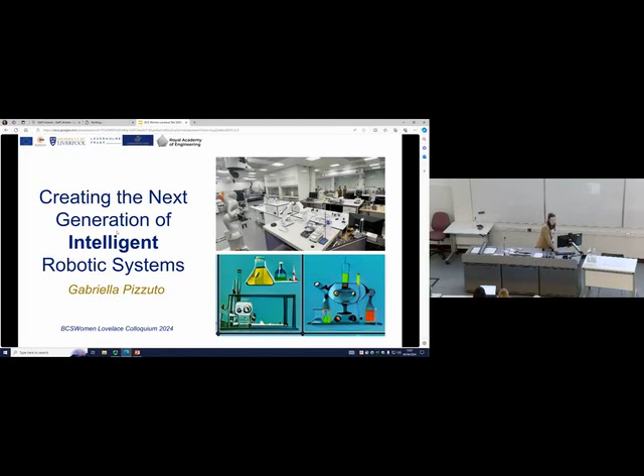I'll start with a short introduction about myself. I like taking pictures with robots, I like working with robots. I did my MSc in Computational Neuroscience and Cognitive Robotics at the University of Birmingham. I did my bachelor in Malta, I'm originally from Malta, and I did it in engineering. So I started in computer science quite late, I would say, during my MSc.

I started working with robotic arms. I don't know if anyone is from Birmingham here, but there was what we called the robotics dungeon. It was underground, and there was the lab there. I spent a lot of time during that summer.

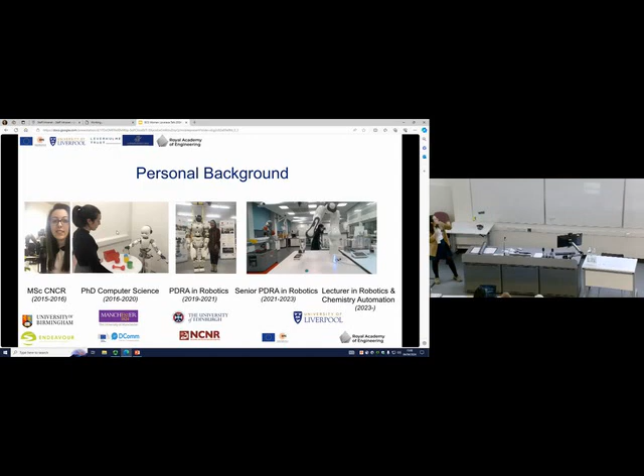Then I moved to the University of Manchester, and I did my PhD in computer science there, working on the humanoid iCub robot. During my PhD, I was also part of a Marie Curie program, and I did some visiting projects at the Italian Institute of Technology to learn more about working with the iCub. I was basically fusing computer vision and language understanding on the robot.

Then I decided I really liked working with robots, so I moved up to Scotland, to the Edinburgh Centre for Robotics. I thought they have a really cool centre for robotics, but COVID hit. So it was just mainly nice pictures, and I only used the robots for like 6 months before shutdown.

Then I realized that chemists got back into the labs, and roboticists were still at home playing with simulations. So I decided to join a chemistry lab to deploy robotic systems, so I could actually be in the lab again. In 2021, I moved to the University of Liverpool to work on a European project.

We were basically trying to create robotic scientists. The idea was that robots are faster at carrying out experiments. There was a lot of crisis with the vaccine and trying to come up with a new vaccine, and we also need to accelerate how we discover new materials. So I thought it was a really exciting time to join this project.

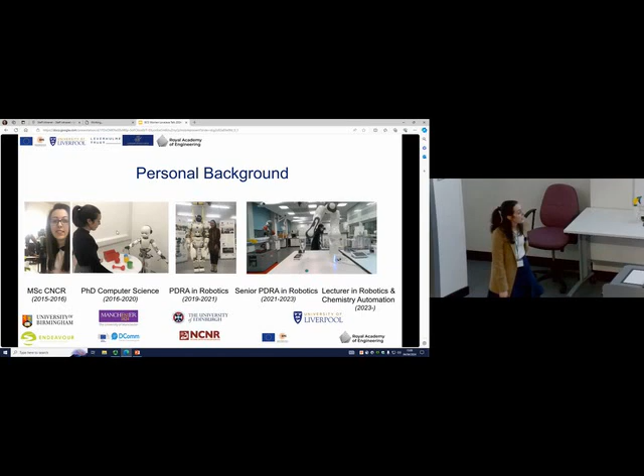In 2023, I started as a lecturer here in Liverpool between computer science and chemistry. I also joined the Royal Academy of Engineering, a research fellowship, which is a 5-year research program that will allow me to pursue my research.

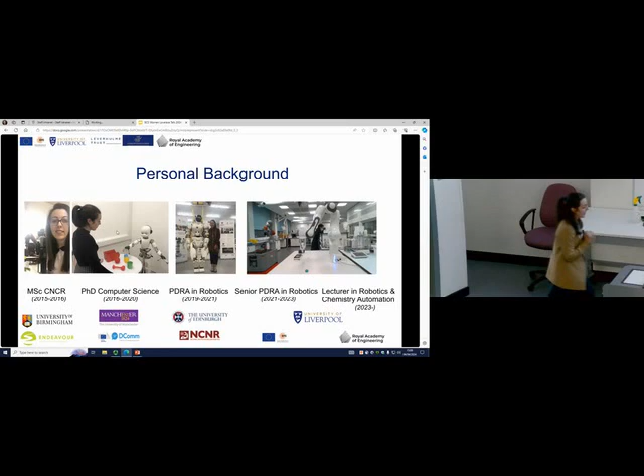So that's basically in a nutshell. If you need any tips on an academic journey, which is very different even for the CV - we like long CVs, so they were absolutely right. But I will give more information at the end.

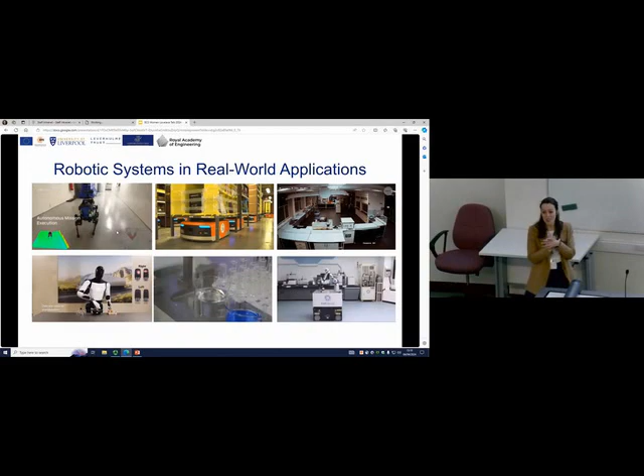So what does robotics look like in real-world applications? I know there was Ocado downstairs, they also have some interesting robotic systems. I think what I'm truly excited about is using robotic systems to carry out tasks that, in my opinion, could be hazardous for humans or could help humans in some way or another.

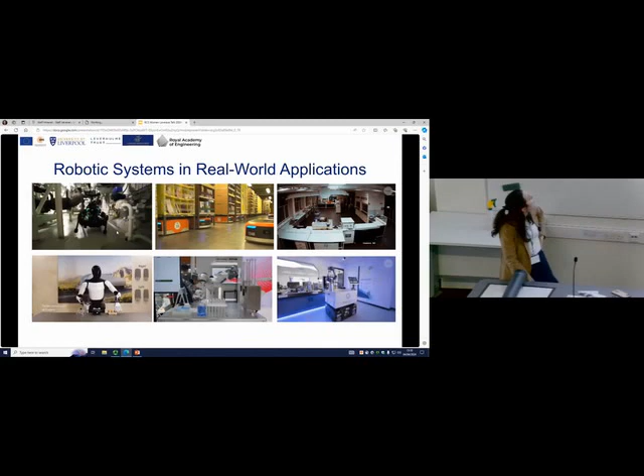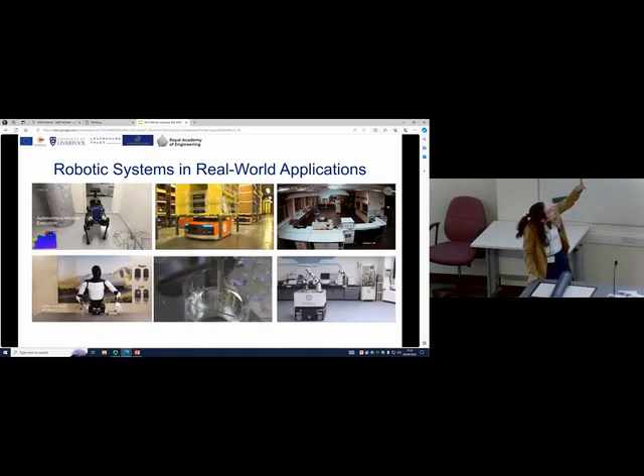If we look at the videos, the first one was a project in Edinburgh. We have a quadruped robot navigating on an offshore oil rig. Then we have some robots at Amazon - in the warehouse they have some robotic arms and some mobile robot bases.

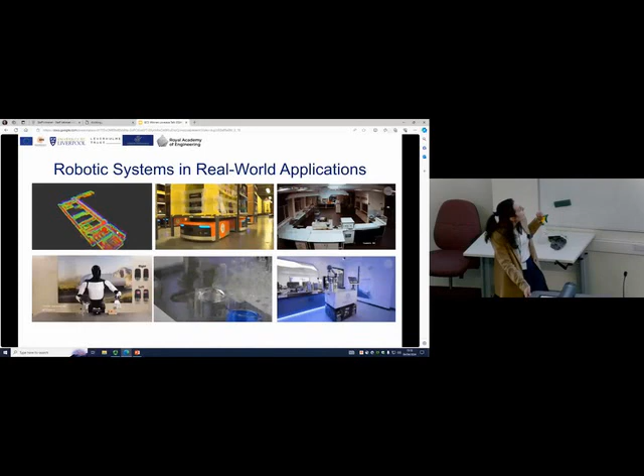I'm sure most of you are familiar with the new Tesla humanoid robot, which was just released last year. It's quite dexterous, able to do some grasping tasks, and the research has been quite accelerated. So I would envision some humanoids in the future to also be part of our lives.

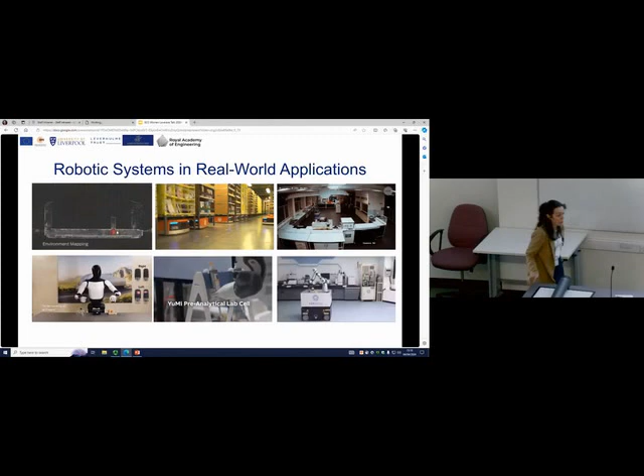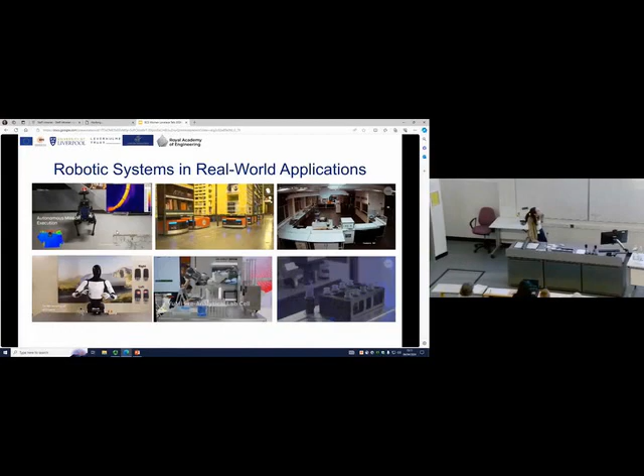The other videos are more robotic systems for lab automation. The top right is at the University of Liverpool, that's our robotic chemist. Then we have some YuMi robots, which are 2-armed robots, in hospital labs. And another robotic chemist in China is carrying out some materials experiments.

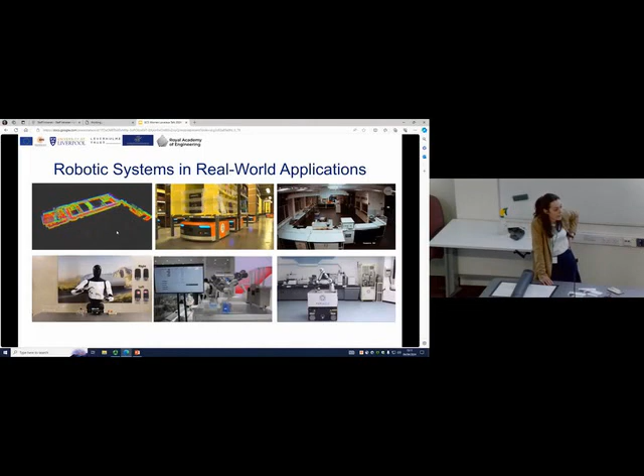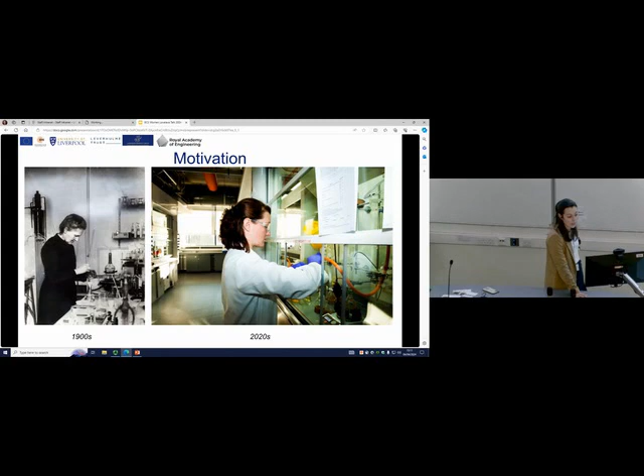So why am I so excited about working on robotic systems in laboratory automation? If we look at the 1900s, I'm sure most of you know the scientists, and if we look in the 2020s, chemistry labs look more or less the same. The right part is a quite advanced lab, the Materials Innovation Factory. There isn't a lot of robotic systems still, so for us it's an exciting time to start thinking about what challenges we need to overcome to deploy robots. So why is it so challenging to deploy robots in these environments?

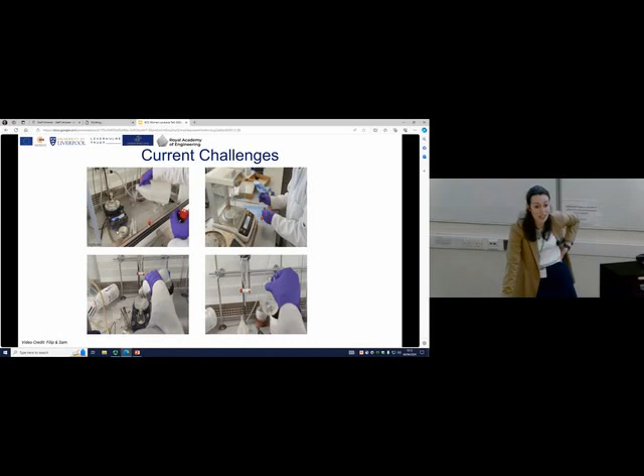When I joined the University of Liverpool, I spent some time looking at how chemists carry out their tasks. If you look at these videos, you can see that they're very highly dexterous tasks. Chemists effortlessly carry out their experiments. They use filter paper, which is a hard robotics challenge.

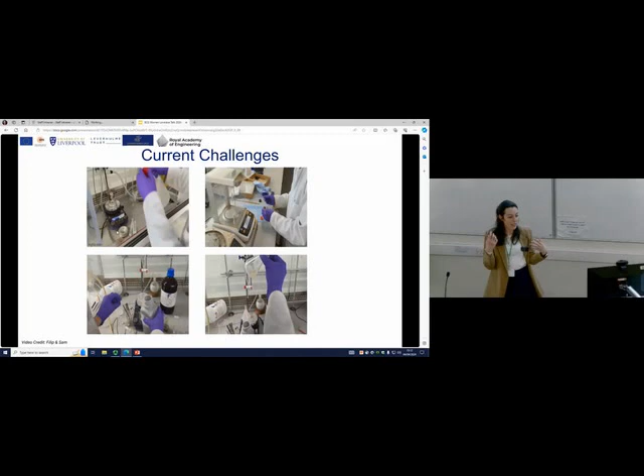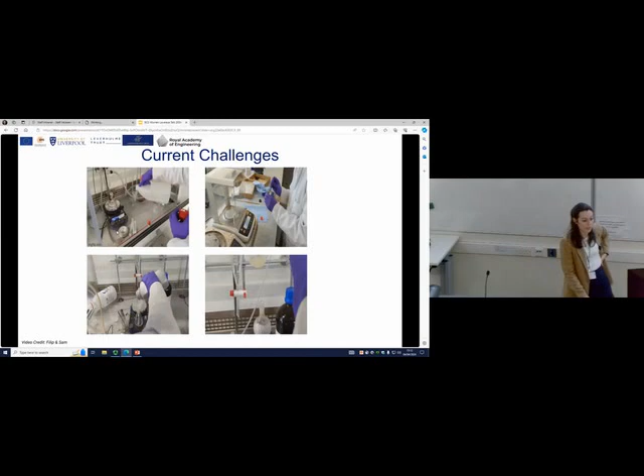The tools they use are not very robotic friendly. And what they do very easily is look at the samples and know what is going on in the reaction. In lab automation, we're still a bit behind in terms of trying to move closer to how we do it with human chemists.

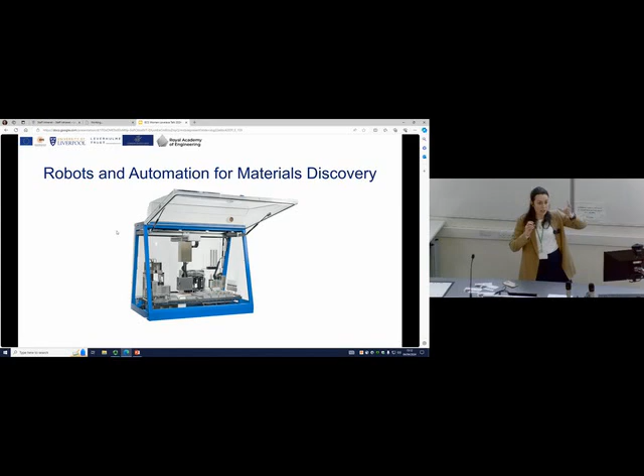Of course, it's not all not automated. So there is some equipment like this, we call it the ChemSpeed. It's basically, I call it, like a washing machine. It's very good at doing one specific task - it dispenses some solids, dispenses some solvents, and mixes things together.

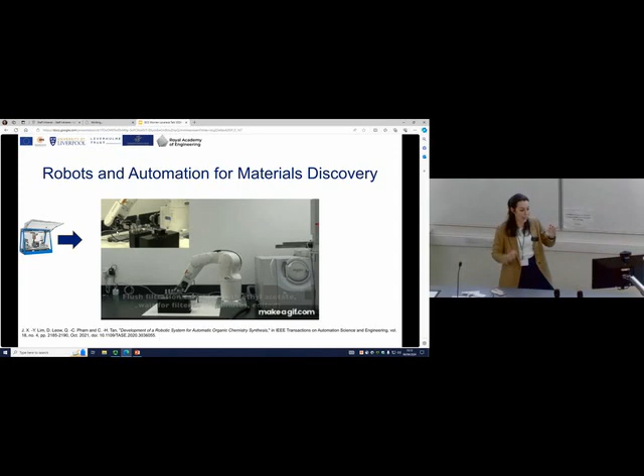There's some fixed robotic arms. This one, I think, is in Taiwan, if I'm not mistaken, and we have a fixed robotic arm that is carrying out a specific reaction. As you can see, it's very robotic friendly, so you have the analysis equipment behind. The robot is quite industrial, and everything is kind of fixed in the same place, so everything is rigid.

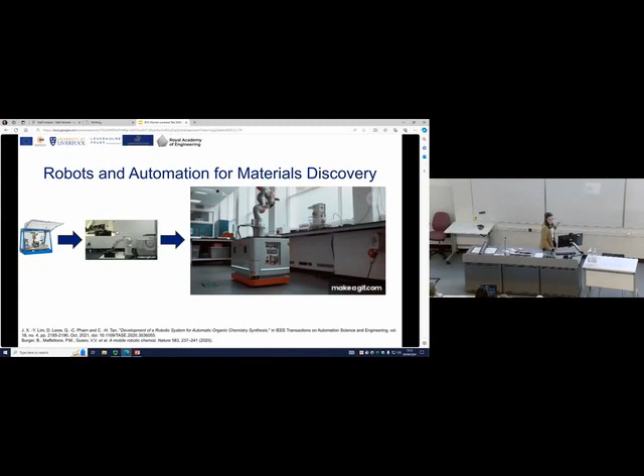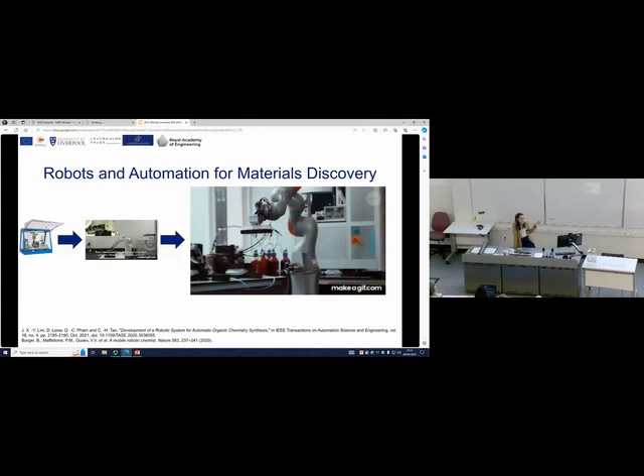Then, I think what is particularly exciting about Liverpool is that we have the mobile robotic chemists. So our vision is that we need robots and humans to work in the same lab. The robot is working in a lab that humans can use. It's using the same analytical equipment, the same glassware, and everything is more or less similar to what human chemists would use. This represents different transitions of automation to robotics in chemistry labs.

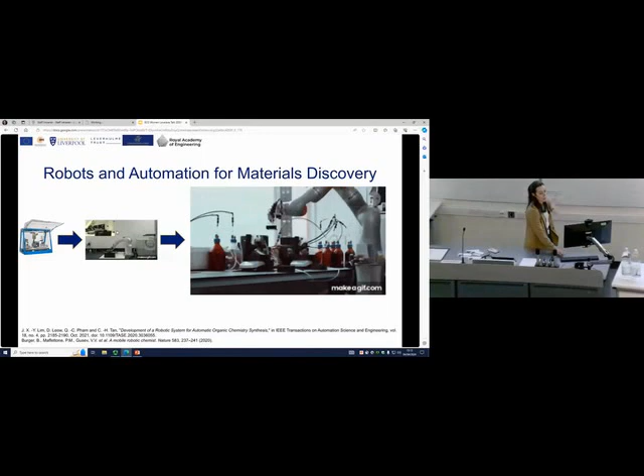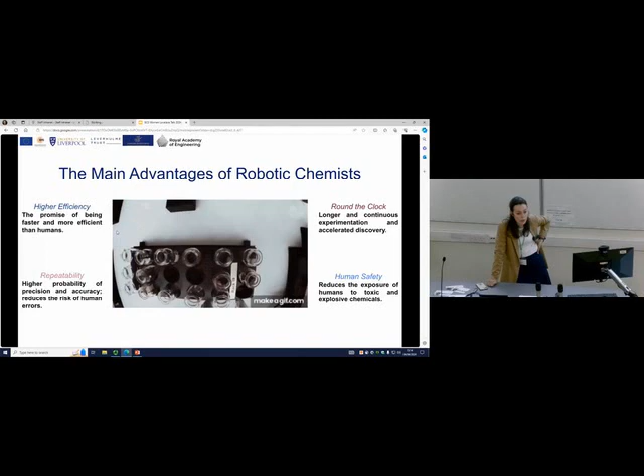There are a lot of advantages, I believe, to using robotic chemists in our labs. Of course, robots can work around the clock. They promise higher efficiency. This is quite useful also in materials discovery because there are some reactions that you need to do around the clock as well. A lot of experiments are longer, continuous, and very boring. There's human mistakes as well that are done because they're done manually, so automating them is important.

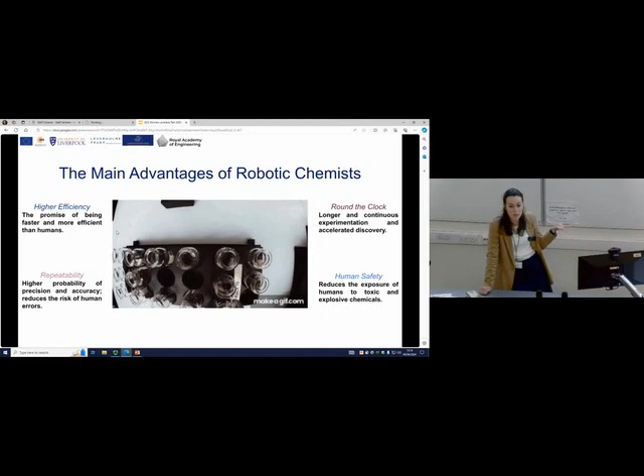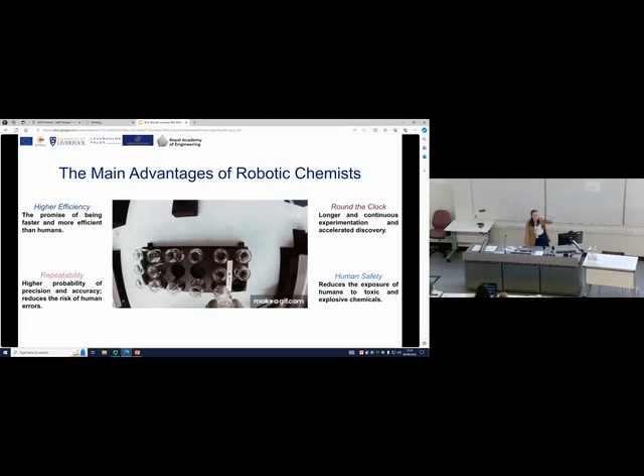There's a lack of reproducibility as well in science, so there's a lot of published work that cannot be reproduced. Having robots carry out these experiments can help shorten this gap. And finally, a lot of chemicals, especially the ones in the early stages of discovery, are quite toxic and harmful, so if we minimize exposure of humans to these chemicals, it will be safer for human lives. So that is a bit of a motivation on why and what we're doing with robotic chemists.

Today in my talk, I will focus on two simple research directions that I have been carrying out with the rest of the team here in Liverpool. The first one is that we want the robots to be able to carry out the same human skills that humans carry out. So why is this so important?

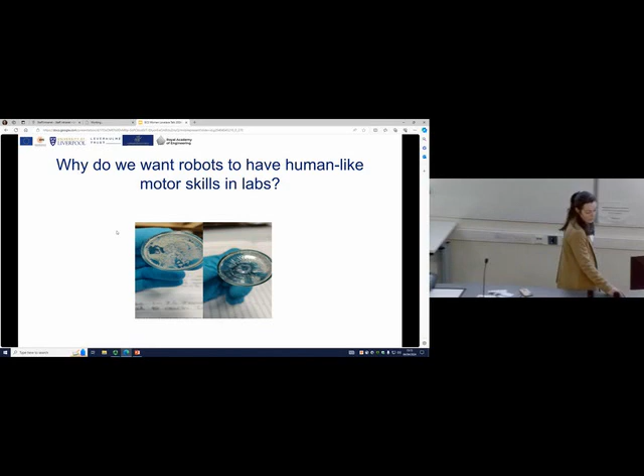So the robot needs to be able to understand that they are different and adapt to the changes in these materials. In the previous work where you saw the mobile robotic chemists, the work was mainly focused on this part - the mobile robotic chemist, which was the robotic part carrying out the reactions. Then you have what we call a chemical brain, which is a Bayesian optimizer, optimizing the reaction that is being carried out.

My research project and research direction focus on acquiring skills and looking at different methods on how we can improve the robot's capabilities to learn these skills. I like to see it as developing another part of the robotic chemist brain.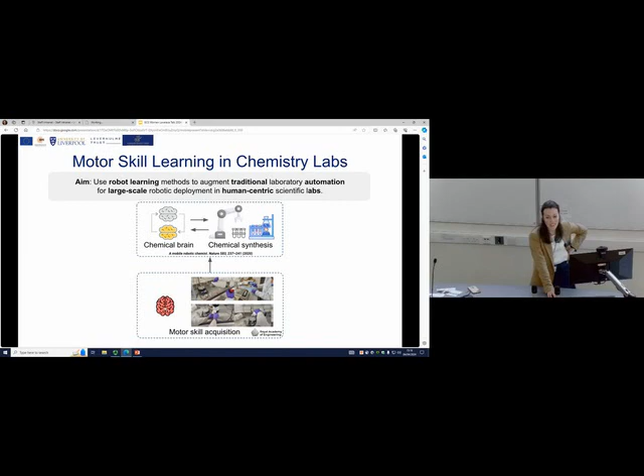In robotic manipulation, we have been studying and trying to transfer human motor control for years. In humans, we see it as a control system, for those familiar with control. You have some feed-forward dynamics, which is the model you build inside your brain, in very simple terms. Then you have feedback, which you adapt when something is new or there is a disturbance in the environment. In robotic manipulation, we take inspiration from this method and build a control system composed of a feedback controller and a feed-forward controller, inspired by human motor control, to control the torques of the robot.

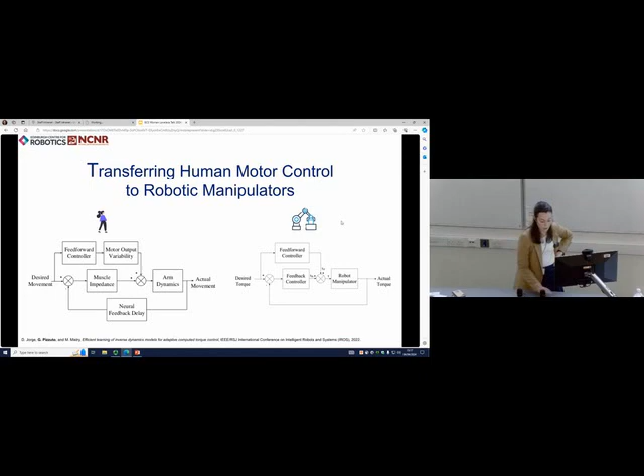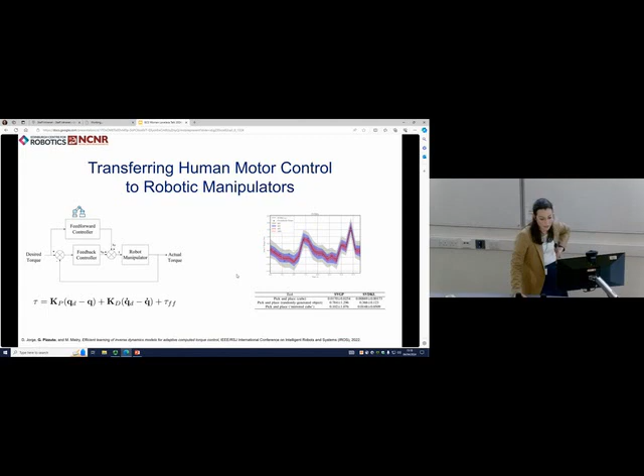In some earlier works, we looked at this control system. The idea is to be able to do the same tasks that humans are doing. You have a feedback controller, which is the KP and KD, and the feed-forward one you can learn either analytically or through a regressor model. In some of the methods we looked at, we learn it through efficient Gaussian process methods. That's one way of learning motor skills.

Another one we were looking at, more applicable to the lab, is scraping samples. You have these crystals, which you transfer for diffraction, X-ray diffraction, so you need to analyze what these molecules actually are. To do this, scientists spend a lot of time scraping samples, carrying out this motion for all of their samples before they move on to the X-ray diffraction.

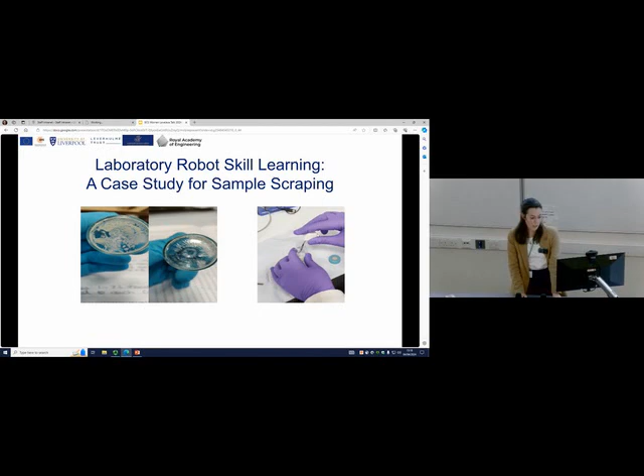Another way we have been learning skills is using deep reinforcement learning. The idea is that the robot carries out an action, and based on the action it takes, it gets a reward or a penalty on the task. In terms of the robotic system, the action can just be a change in position, which here is a Cartesian pose, and the observation can be the proprioception of the robot, the XYZ, or the force feedback the robot has at the end effector of the gripper.

The goal is a distance goal, so you're trying to minimize the distance between where the robot is at and the goal it's trying to achieve.

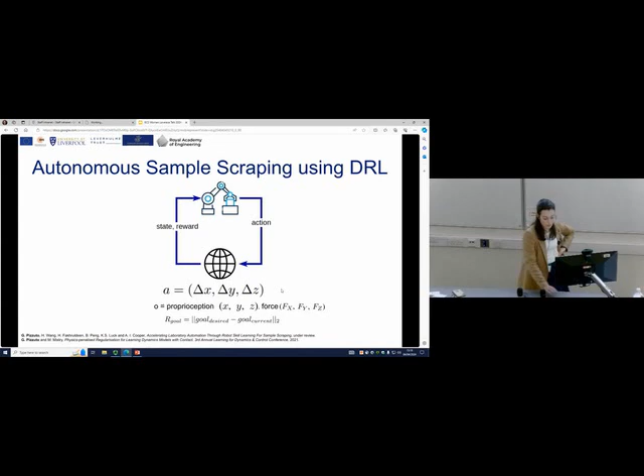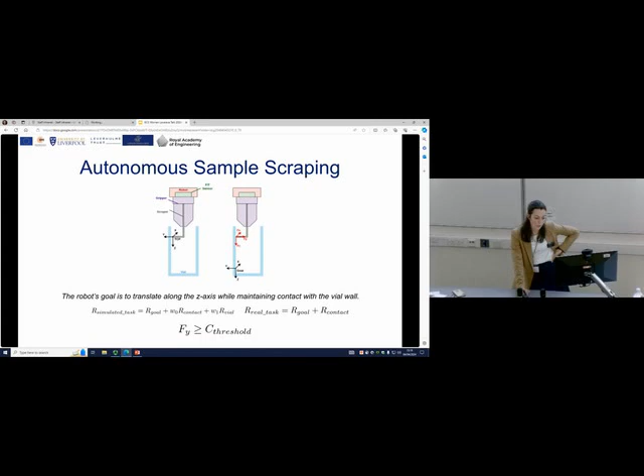In terms of the laboratory sample scraping task, we formulated it this way: the robot scrapes the vial wall, starting from the top and moving down in a vertical motion. The goal is to maintain contact with the wall, not topple the vial in simulation, and minimize the distance between the end effector and the end of the vial. We carried this out in a simple simulation environment and also with the real robot. As you can see here, the robot was able to scrape the sample.

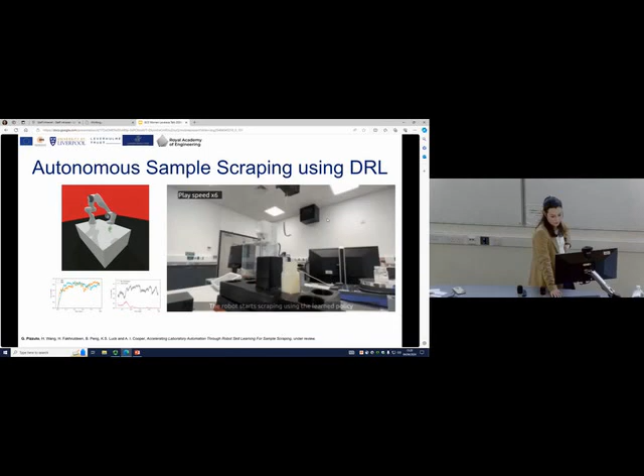So far I've shown you can take inspiration from human motor control using control systems, and you can also adopt a reinforcement learning approach. In another work, we looked at using a rule-based, fuzzy logic method to be able to handle different samples.

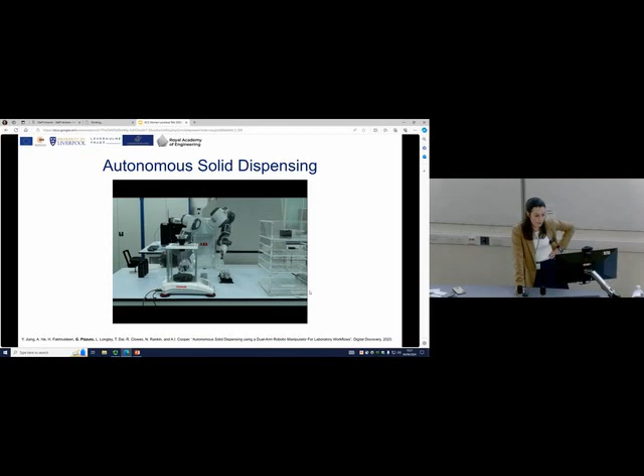Okay, so that was the first part of my talk on how we can have robots and manipulators do similar skills to humans in laboratory environments. In the next part, I will talk about how we used computer vision and perception methods to understand samples non-invasively. This was particularly important because a lot of times when chemists carry out reactions, they are able to look at their samples and know whether the reaction has worked or not. We wanted to understand if we're able to take a similar approach using perception methods.

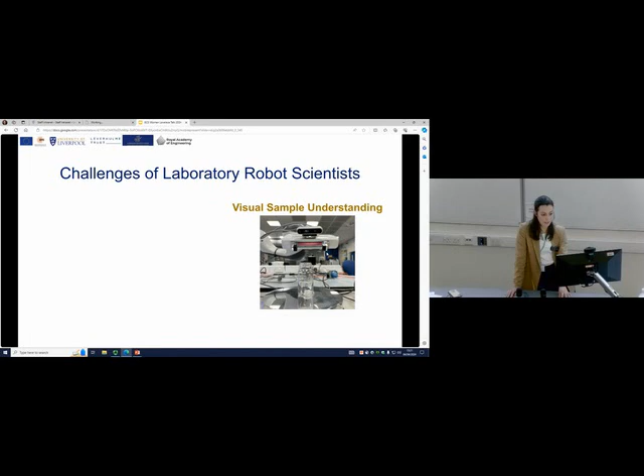The reality was that when I joined the group, I expected it to be a very easy computer vision problem. You would look at the samples, they have nice reactions, which seems easy to solve. But in reality, this is how the labs and samples actually look. Most solvents, organic solvents, are transparent. The laboratory equipment is also transparent. You have white equipment, white samples, so it's much more challenging.

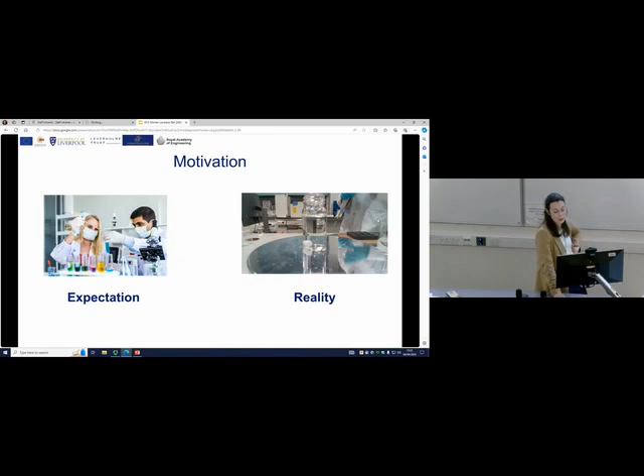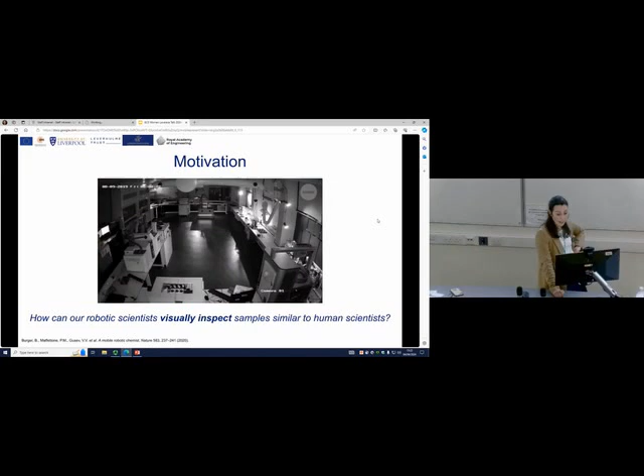While the robotic chemist in the video carried out experiments throughout 8 days, it was not able to visually inspect the samples, so it was just going through the motions without fully understanding what it was going through. So what we did was try to build a simple classifier. We had this robotic process, which is the first part - it's like baking a cake, basically. You dispense some solid, some liquid, stir it, and then look at the sample to decide whether it has dissolved or not.

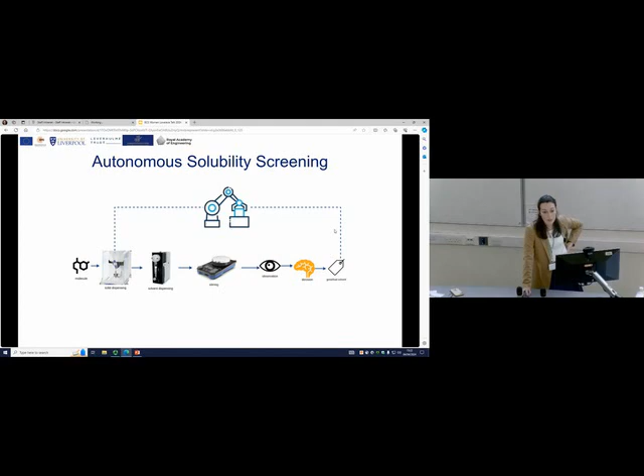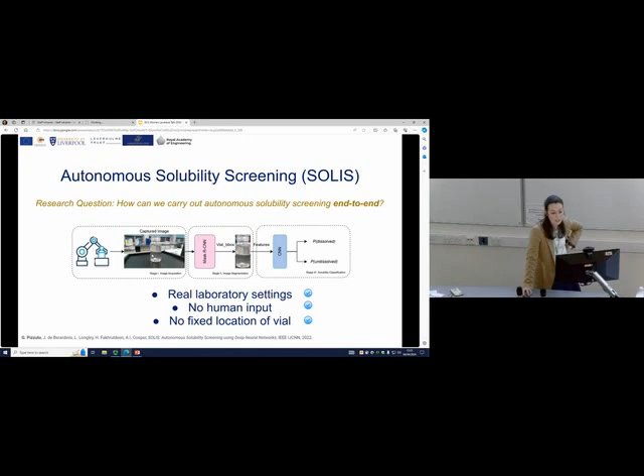For those of you familiar with convolutional neural networks, we used a multi-stage neural network. We used image segmentation, which at the time was Mask R-CNN - it was state of the art, but now there are better methods. Then a simple classifier to tell us whether the liquid or solid has dissolved in the sample. The nice thing about this is it allowed us to work in real laboratory settings. All of our research is focused on carrying out these processes in real laboratory conditions without any human input, and of course to carry it out in different laboratory environments.

Another project we looked at, to understand whether we're able to assess samples visually, was trying to understand viscosity. The idea is that different liquids flow differently, and if we have a robotic system able to analyze this, it could be useful, for example, in collaboration with industry like Unilever. They were interested in the flow of shampoo, for example, and this used a basic 3D convolutional neural network to track the motion of the fluid and then classify whether it's highly viscous or not viscous.

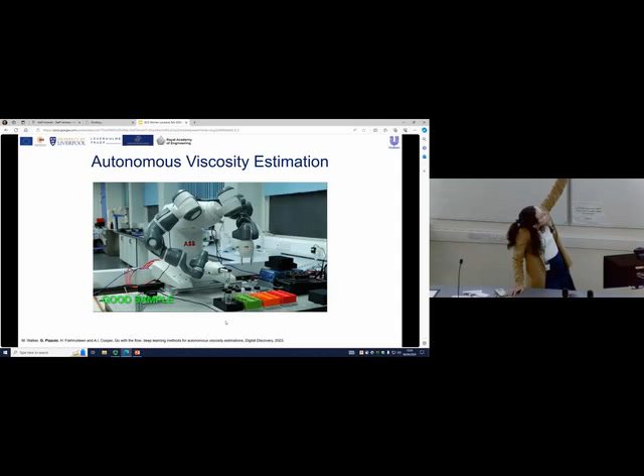Okay, so this is the video. It's also able to sort out the samples depending on the viscosity level of the liquids. You can see the motions - that's the video fed into the neural network - and then the robot makes a decision based on the prediction of the model. As you can see, the gels are quite transparent, so it's quite challenging to track the liquids even visually.

We also looked at how this method compares to humans. What was interesting was that if we look at different solvents that all look the same, as humans we're able to understand how they flow. But most of these solvents in labs, if they have similar viscosity classes, are really hard to detect with the human eye. So we studied how humans would perform compared to the robot, and the robotic system was around 88%, while the human chemist was around 35%. So the model was able to pick up patterns that even humans couldn't detect visually.

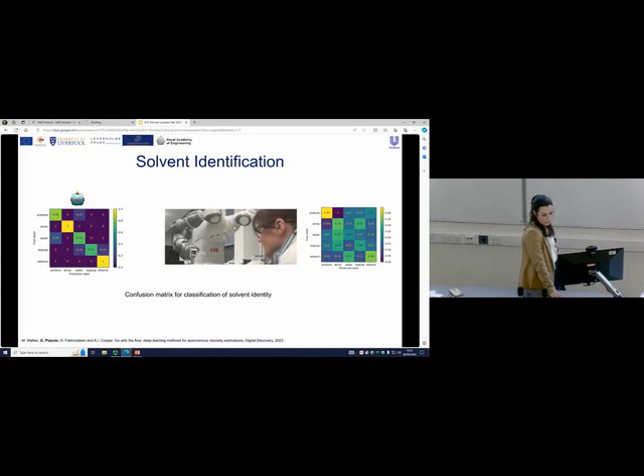In terms of our current ongoing projects, we have two research directions we're currently working on. Since everyone is using ChatGPT and these kinds of models, I wanted to portray the projects of my current students in terms of these networks. We're looking at how robots are handling different materials, and we're doing it from a chemistry lab setting, but of course this can be applicable to different industries. As we are very excited about having robotic systems in human labs, we also want to understand how humans and robots can work together and how robots can become safer when working in close collaboration with humans.

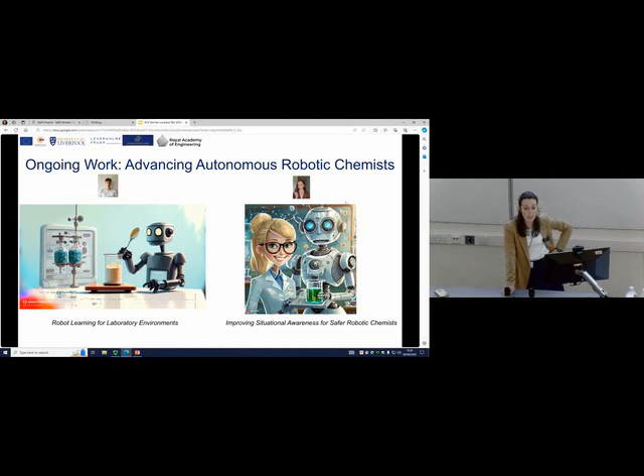So just to wrap up, I think previously there were a lot of slides and presentations on how an industry job looks like. This is how an academic job in robotics looks like to some extent. I get to spend a lot of time playing with robots. Since my master's and undergrad, you also get to meet a lot of exciting people, travel a lot, and visit different labs to see other robotic systems. So I think overall it's very exciting.

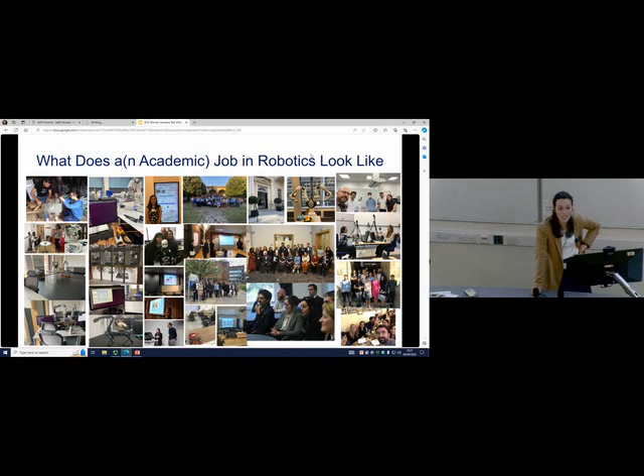If you have any questions on how that looks like in an academic setting, I would be happy to answer that. We also have a new Centre for Doctoral Training in digital and automated materials chemistry, but there are some robotics projects as well. It just started this year. For those of you finishing your masters or towards the end of your degrees, I'd encourage you to have a look at the pages. It's a 10-year program, so even if you're in your first or second year, there could be other opportunities in the coming years.

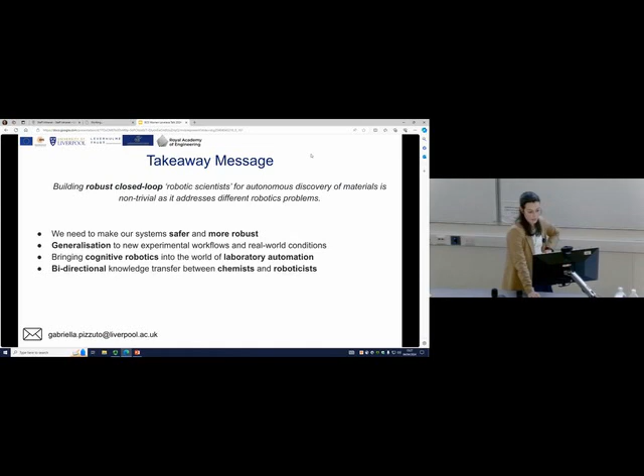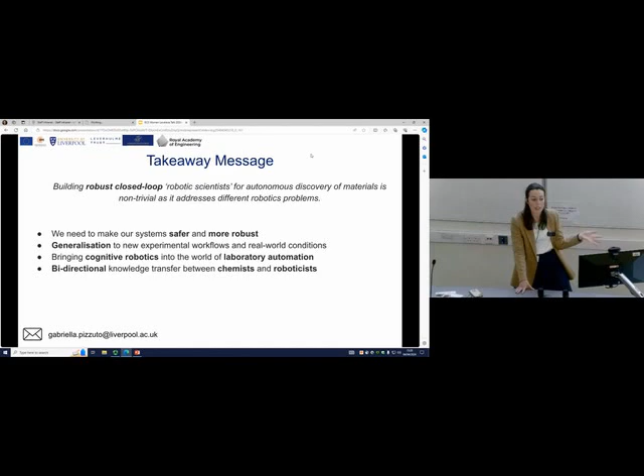In conclusion, the way I see it, building robotic scientists is a very broad robotics project, and it's important to bring together different disciplines. One thing that's particularly interesting and important is safety and how we make these systems more robust, because we're working in a safety-critical environment. I think generalization to new experimental workflows, especially when working with chemists who are non-expert users of robots, is really important. It's particularly exciting because you get to see your robotic systems being used by chemists in real laboratory settings. Some acknowledgements to collaborators and the research funding that has funded my research, and I'm happy to take any questions.

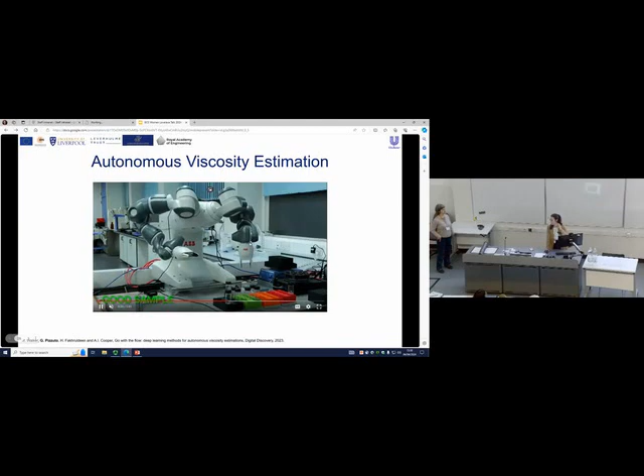Okay, and do you find yourself anthropomorphizing them? Do you find yourself thinking, oh look, it's angry, or look, it's happy with that one? Because I look at that and think, it's just two arms, but somehow some of them look happy, like it's just happy there, right? And this one, when it gets one that's... I was really happy with that one, because it's a good sample. But do you not find yourself thinking that? There's a lot of research on emotions with robots, and I think because it looks human-like, it's easier to attribute. It's just two arms on a brick though - how do we turn that into a human?

Sorry, I'll stop now. Has anyone got a better question than me?

Hello, Sarah from London South Bank. Do you get to build any robots at all from scratch? I think as an undergrad I built some robots, but right now, because we need them in our research to be repeatable, we buy commercial industrial ones just because they're more repeatable. Usually the robots that we buy, you just take them out of the kit and put them together. My students want to build robots, so maybe in the future we can start thinking about building them, but right now I think we're still not there. Cool, thank you.

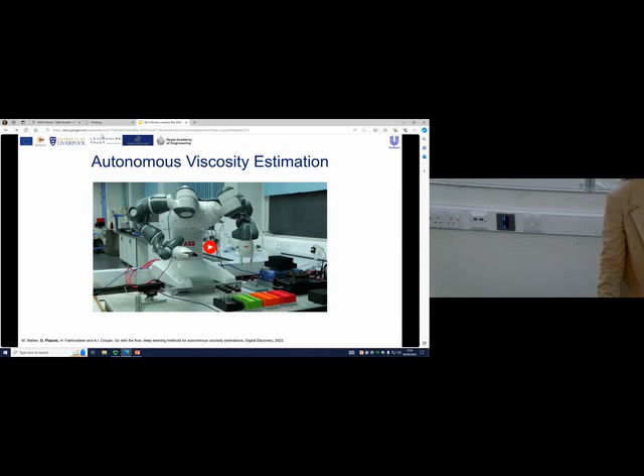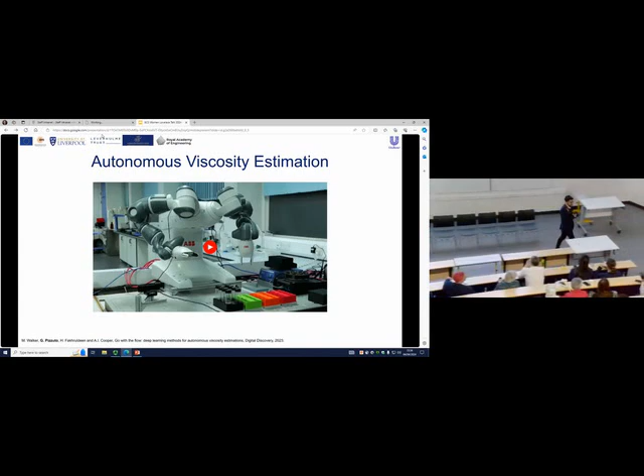Okay, one more question, I think we had one over that side. So, in most of the examples you've shown, it kind of looks like the robot works independently, right? How possible is it, or how soon would it be, that you could have humans and robots working together - but autonomously, not like the Da Vinci where a human's controlling it - where the robot can work on its own and still be aware of the human working and not get in the way?

Yeah, so I think there are two questions to that. If you want robots and humans to share a workspace, there's a lot of things you need to consider - it's not just the technology, but legislation if something goes wrong. So you still need to think about that. In lab automation and material discovery, the goal of the robotic system is to carry out an experiment for a long time - otherwise, for the chemists, it's not good enough. You want it to run for weeks, ideally months. In that case, they would prefer to sacrifice removing the human, or putting them in another part of the lab, so the robot runs repeatedly and you don't worry about safety if something goes wrong. So it depends mainly on the application.

I think in household robotics, for example, you need to share the workspace, the home, with a human. So I think in that aspect it will take longer to have humanoids, I think - but maybe Elon Musk can prove us wrong. It will take longer.

In lab automation, I think it might be faster. I've seen a lab in Germany that had a robot even going up between floors, between labs in the same building but different floors, carrying out quite a long experiment. It looks like they're carrying out experiments autonomously, but for humans - especially chemists who aren't robotic experts - they will lose interest in the robot quite fast if it breaks. So you want to make sure it's quite repeatable before you would actually deploy it in human environments.

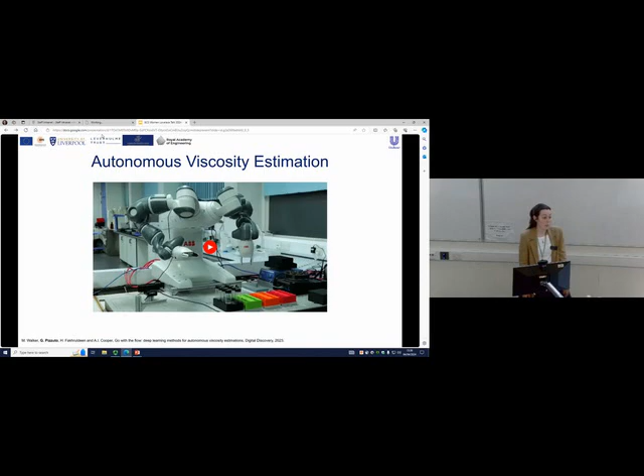Okay, thank you very much.